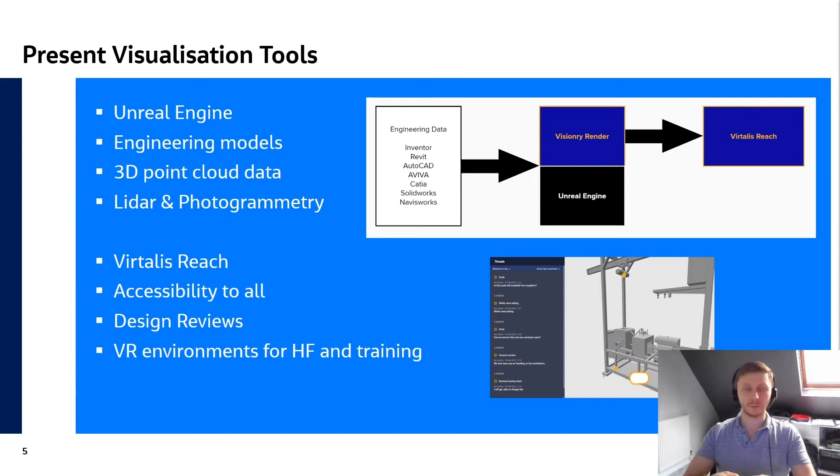I'll play a little animation now, have that running in the background while I talk further about what we've been doing. This example, for instance, is very early doors.

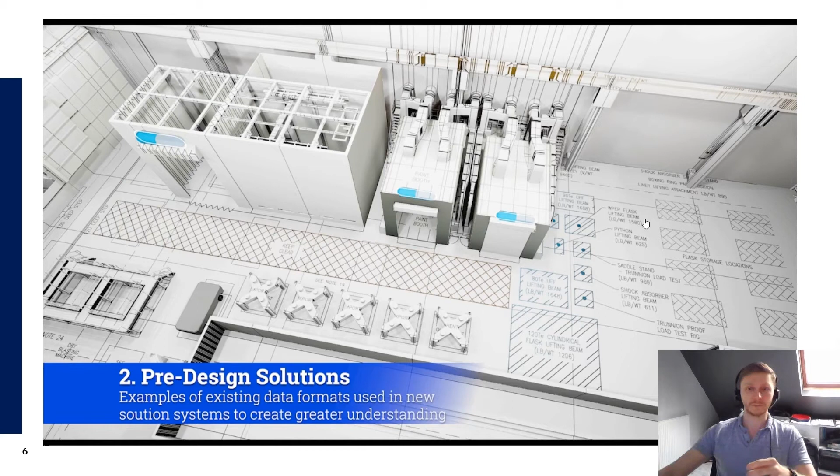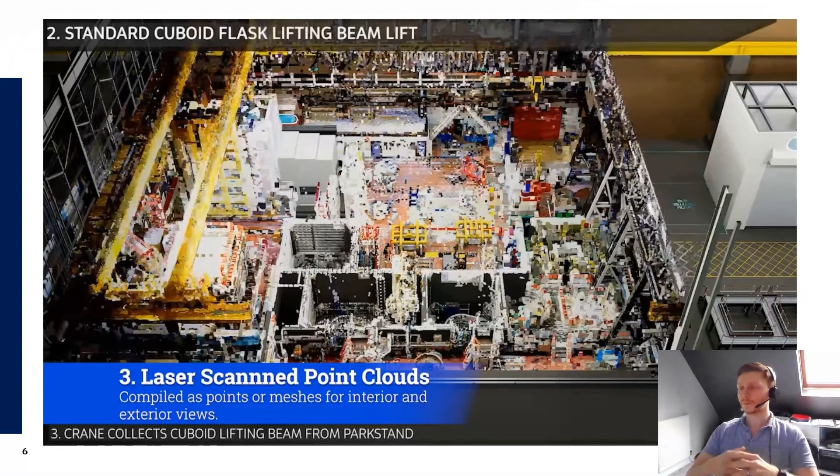We had no 3D models, just models from vendors that you can see. They were implemented into Unreal Engine, and that allowed us to make a visualization before there was any actual engineering work done. Within that, we can use 3D point cloud data and engineering models as the project progresses, so we build it up as we go.

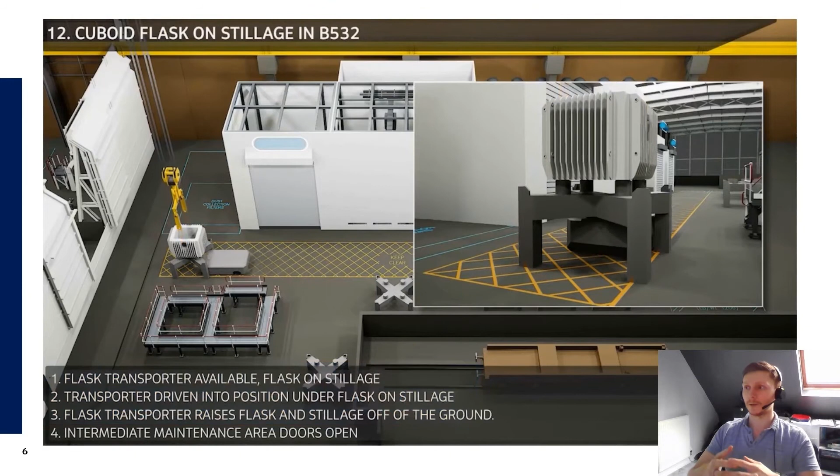Recently we've been using LiDAR and photogrammetry. We've not used it in anger yet, but what we're looking to use it for is an iterative process during a commissioning phase where we can quickly get a view of where the build is up to and feed that back into our live models.

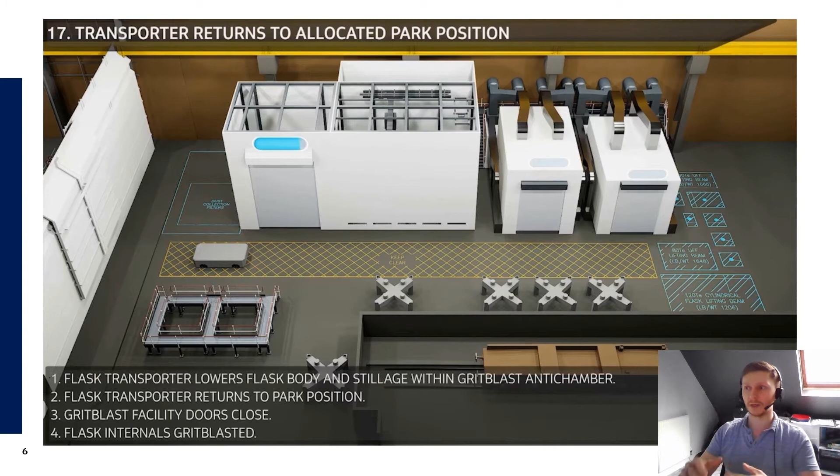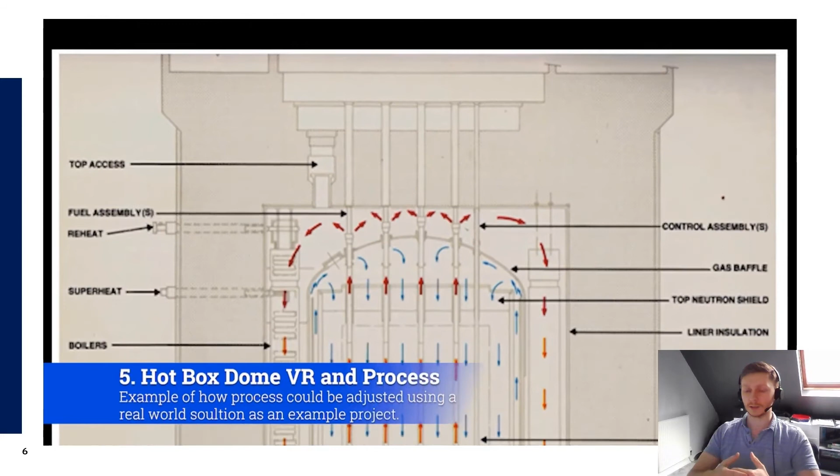On top of using this for visualization, we've also been using Reach from a more engineering standpoint. Virtalis Reach is an end tool where we create our 3D models in our chosen packages, whether it be Inventor, Revit, Catia, AutoCAD, Aveva, SolidWorks, etc. Then we can put them into Virtalis Reach, which allows us to access those models through a web browser interface.

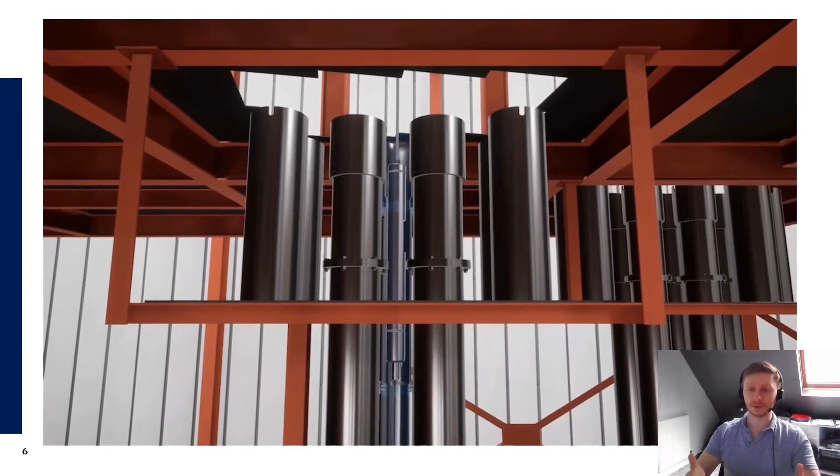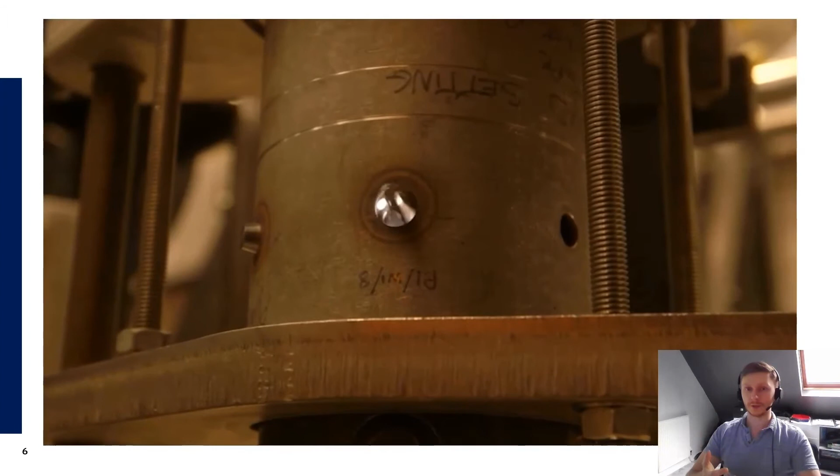Historically, we've done, and still do, design review meetings using a tool called Navisworks for visualization and collecting multidiscipline models into one space, which is fantastic. But what Reach allows us to do is go one step further, and it allows each user to have their own instance.

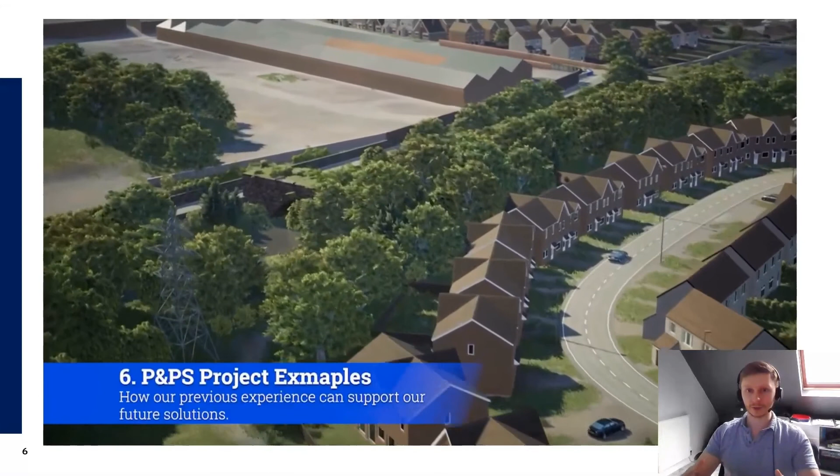Rather than having one model up on a screen that is shared with one person moving around showing everybody what's going on, it's almost a collaborative space where people can enter into the model themselves, move around freely. We can grab their attention when we want, highlight things where we'd like them to look, and use that as a more interactive way of reviewing the design.

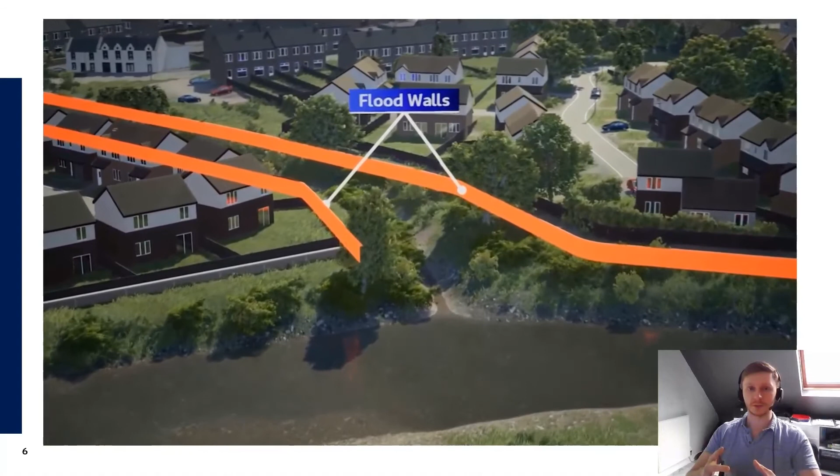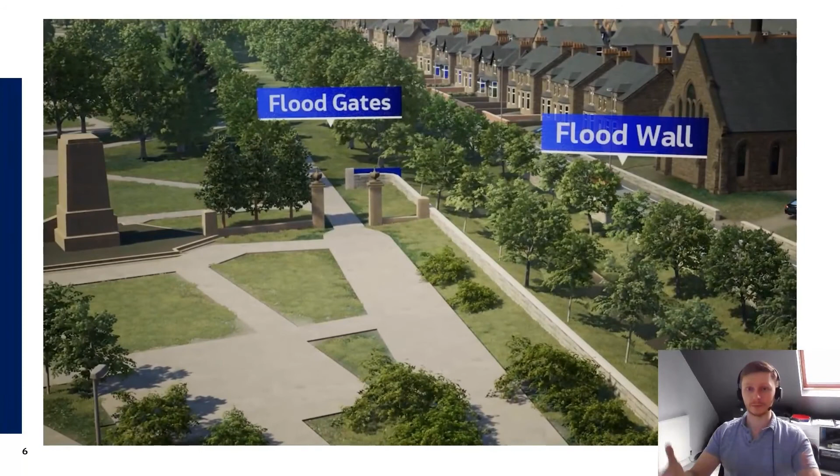With the comment tool that it allows you to use, we can leave comments, so we can capture everything that was said within the meeting, alongside meeting minutes we would do historically, just to add more depth and knowledge to take away from the meeting.

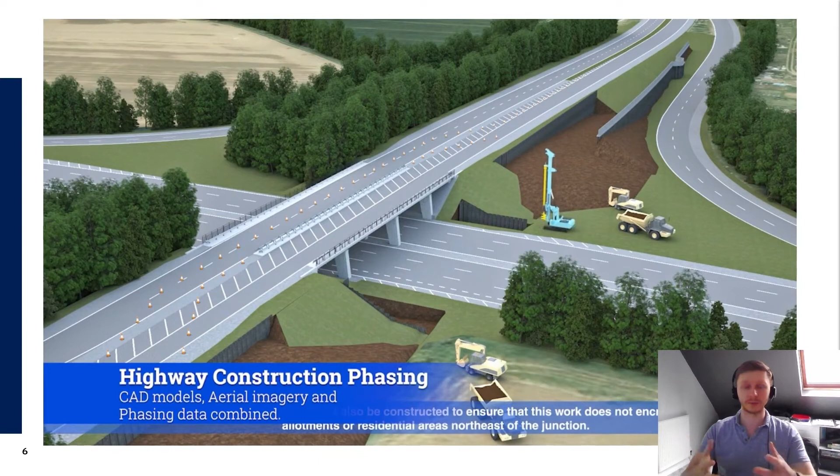Once the meeting has finished, that same instance of the model can be shared with everybody, including people who couldn't make the meeting. What it allows them to do is go in at a later date and make corrections or comments or add their input with full scope of what was said in the meeting, what was referred to.

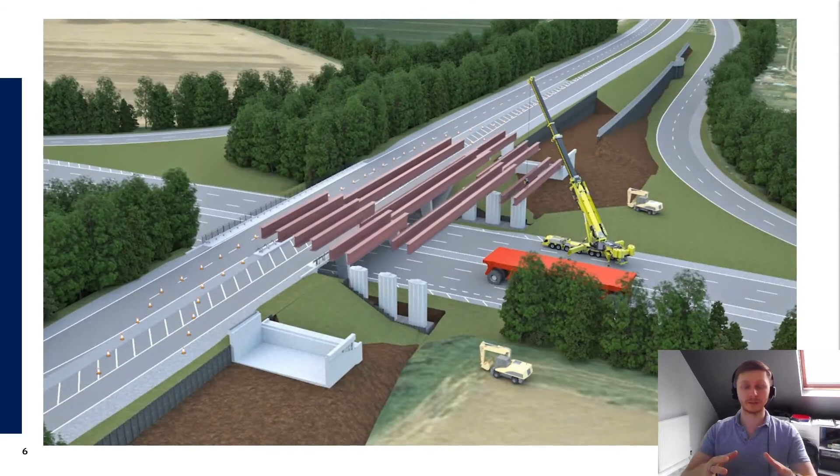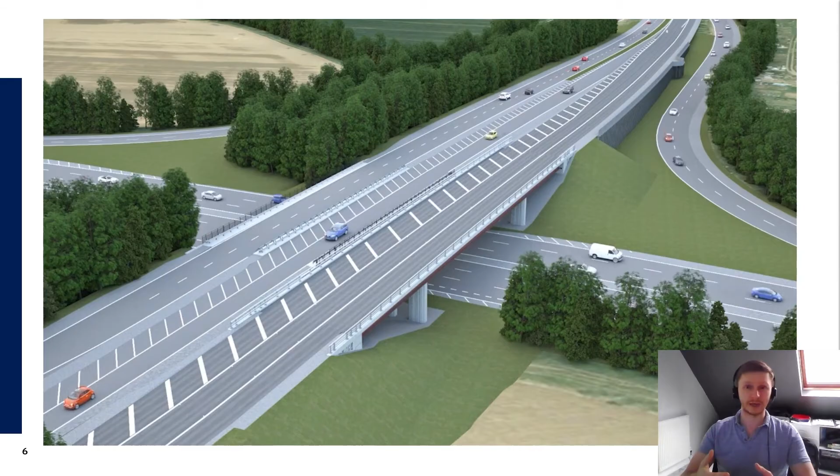It allows us to see from the perspective of the person making the comment. So it just allows somebody who was not able to attend the meeting a closer insight to what was said and why it was said during the meeting, something we've not really been able to have before, other than recording an entire meeting and letting somebody sit and review that.

And then obviously we can monitor what version of the model was used at what meeting, and that just gives us records for us to keep track of and reference if we wanted to.

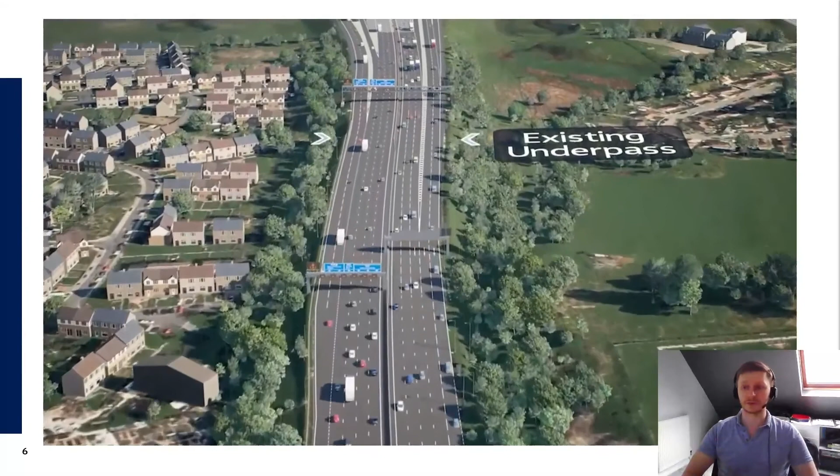I'll skip ahead in the video.

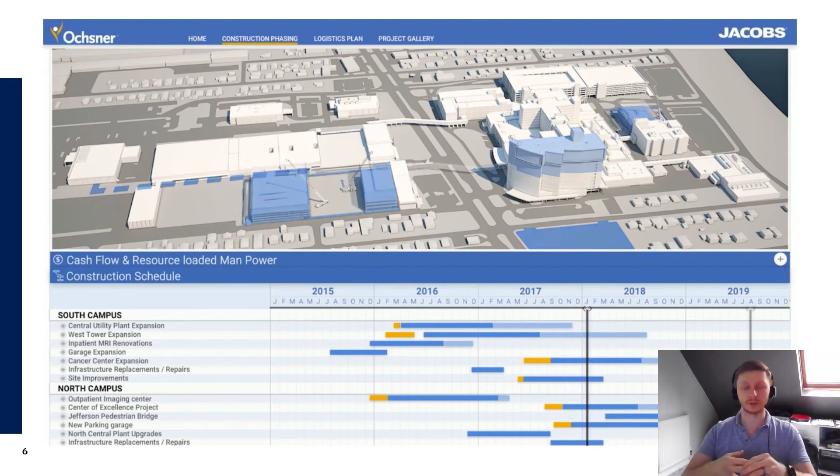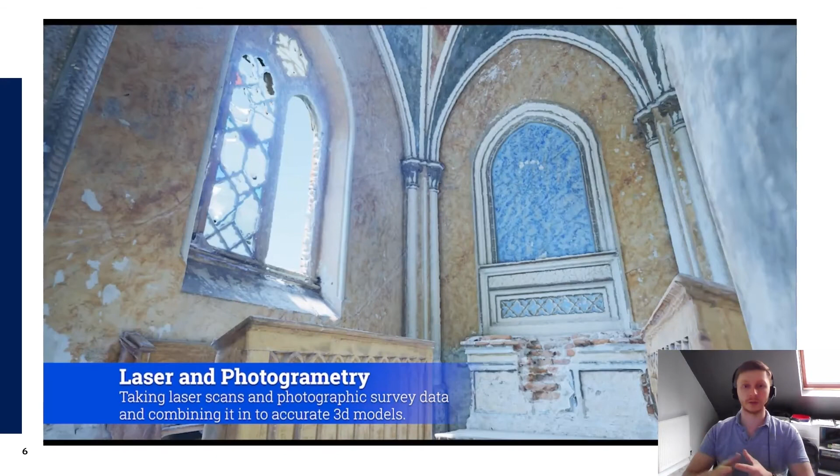One of the things we've been looking at is obviously 4D and 5D modeling, and this is arcing back to the digital twin I was talking about earlier, that we're trying to implement now, starting at an early stage and putting as much information in as we can from the beginning, just building on top of it. Trying to shoehorn this information in at a later date is very difficult and costly, time consuming, and people don't often always see the value of it. But if we can build it in early, then that's what we plan on doing.

So going forward, what we really want to do is offer digital as a service. Right now what we've got is engineers on projects who often do the BIM coordination and produce these visualizations and animations. As the demand for these visualizations and interactions is increasing, so is the software becoming more specialized. What we really want to do is leave our engineers as engineers, and create a digital team that can then support each project individually.

The additional benefit of doing that is it allows us to pool all of our knowledge and learning from experience on current projects, and projects we've worked on in the past, and apply that going forward. So we have this iterative process where we're always learning and implementing new ways of working. Because it's not just engineers doing this job, we can keep on top of the latest technologies and implement it in the next project. We're not training up an engineer who is then sat on one project for 2, 3, 4 years. As some of our projects take that long, we can lose that knowledge within a project when it could be used better elsewhere.

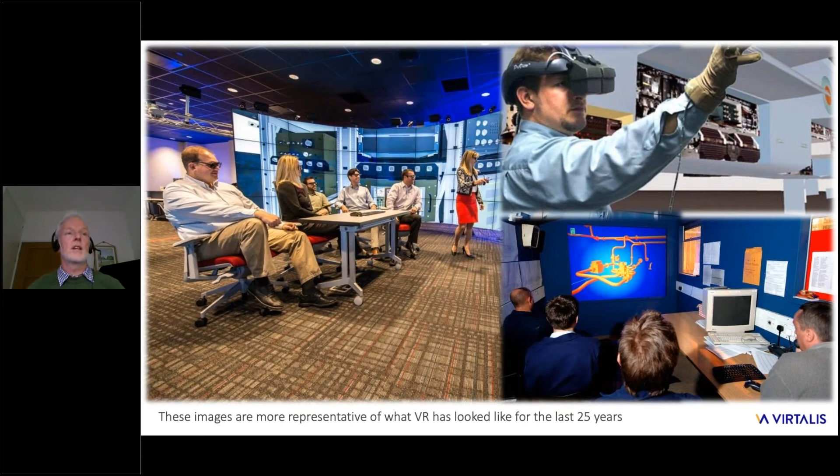This is a point to emphasize as well: there is no one overarching characterization for industrial or professional use. Each organization, use case, and deployment will be unique. The images on this slide, and others I wasn't able to include, begin to illustrate what visualization has meant in practice for different organizations. Some of them appear a bit dated now, but that's also kind of the point. It underlines that professional VR has been something of an unseen hero for longer than a lot of people might be aware of.

The diversity on show with regard to how digital content is being consumed illustrates that there is no one-size-fits-all solution. On this screen we have a 7-sided wall, someone in an early head-mounted display, and this more basic projection but with stereoscopic capabilities in a cabin. But there are some common characteristics that help us define a successful deployment, and I'll come back to that later.

But to set the scene first, we'll assess why it is that there's been such a change in focus between consumer and industrial use.

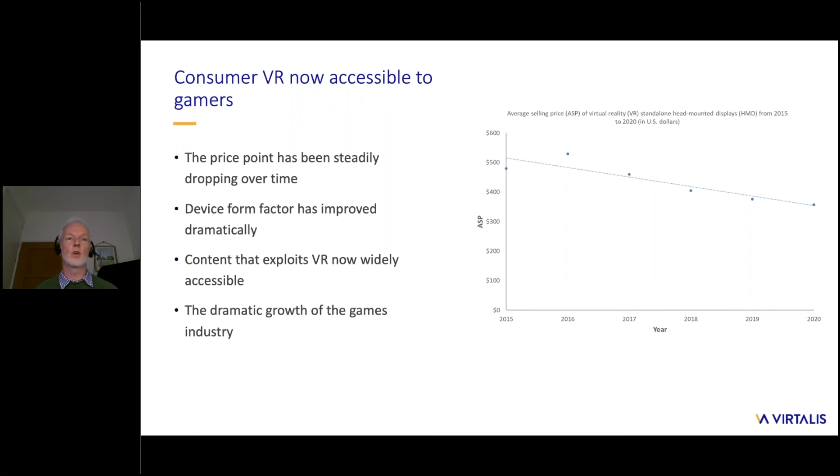VR is something of a specialist field. There are a lot of moving parts to get right and to synchronize. As a consumer, you can be insulated from much of the detail due to the tightly scripted and constrained nature of consumer VR. That said, it's still possible for it to be a pretty unpleasant experience for the end user for a number of reasons. Perhaps the system requirements you've got to operate with aren't all that.

If you're streaming, then bandwidth requirements can really hit. And when these things go wrong, it can lead to jitter in the screen. It can be an unpleasant experience that ultimately makes you feel sick. Motion sickness is a real issue with immersive visualizations.

Consumers are somewhat resilient to this. The people who are buying this, they're a self-selecting group. They've paid their money for some of this, and so they're likely to be willing to push through some initial issues, knowing that there's some good stuff out there and that this will ultimately be a rewarding experience.

But in the industrial or professional sphere, there's a much more pressing requirement to ensure that the deployment is well designed and optimized for the intended audience, who may not be as keen on VR as individuals, at least initially. Now, what this doesn't mean is trying to tick the exact same boxes as would be the priority for a consumer user. Every organization, use case, budget, ambition, and level of VR maturity is different.

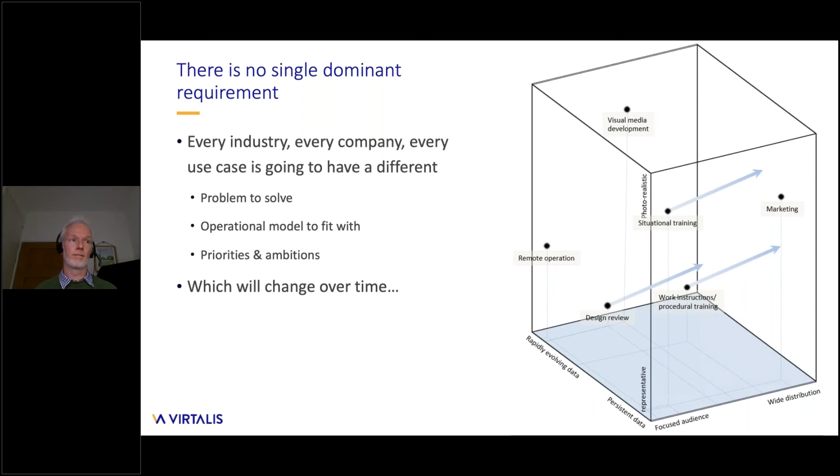As an example, machine learning may be a technology that changes how work instructions are created, the raw material for your visualizations, or even how the visualizations themselves are updated and curated. In any of these scenarios, there are implied changes to the data pipeline, both where it hooks into and the flow rate. So there's lots to go at technically, but the next point I really want to emphasize is that you can get all this right.

It's entirely possible to tick all the traditional boxes for a good professional visualization and still fail to bring your audience with you. There could be manifold reasons for this, and we'll cover some of the higher level ideas in the following slides. However, the background, prejudices, and even the working environment of your intended audience shouldn't be overlooked.

As the saying goes, you can lead a horse to water, but you can't make it drink. Give this some serious consideration. Understand your intended users and every aspect of the environment they work in. Pay attention to how they're used to being presented with data now and what that might mean in terms of a staged rollout. It's not always the case that technology should be deployed just because it's available. So take a holistic view.

One thing I've seen before, which I think is really important, if you are going to be deploying head-mounted displays for your end users, is to think about a code of conduct and how people in the real world interact with those with an HMD on. This can really help overcome some initial reluctance to put the HMD on and create a safe environment for users. The kind of thing I'm talking about is banning filming or taking photographs of someone while they're wearing an HMD.

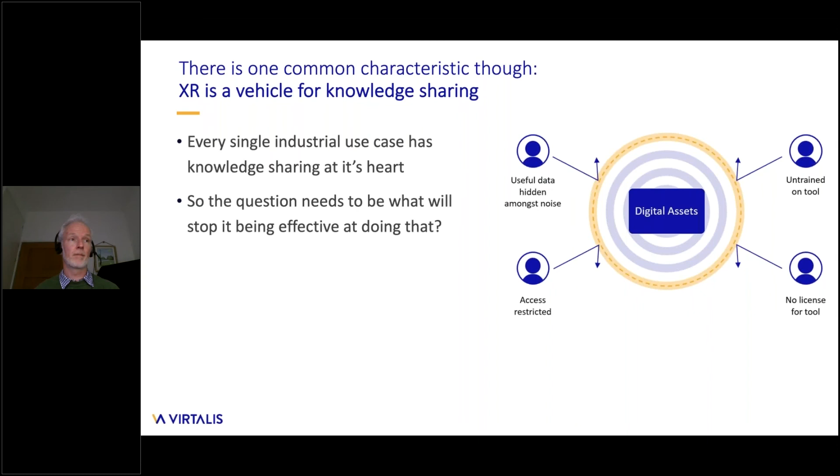Equally, we can begin to pick out some key heuristics, which may not need to be ticked in every case, but at least need to be considered, of what a successful deployment of professional VR might look like. Now, I've identified this as being an effective visualization, or the result being effective visualizations. But whatever we choose to call it, the phrase is really meant to define an end-to-end capability - from data source through to consuming the visualization - that allows it to knowledge share with the users and materially enhances their ability to do their job, work as part of a team, and achieve organizational goals.